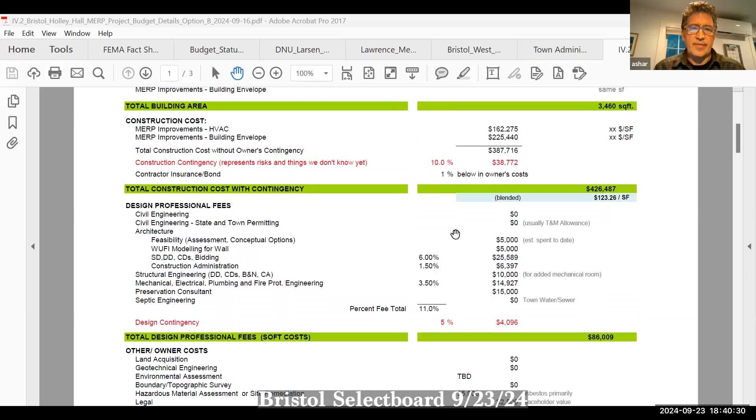So what was our total grant? 500,000, or at least that's what we're allowed to go for. Do we run the risk, by asking for the full amount versus 432, of not getting it, since we're still competing with other towns? Is there any worry about that? Because we could say let's do the full 500,000, and then out of capital funds we'll pay the extra 70,000 ourselves. But are we running a risk of not getting anything by doing one versus the other, since one's the full amount versus...?

Personally, if I was scoring it, I wouldn't look at it that way. I would look at what is more efficient. If I'm awarding you money to make stuff more efficient, I'm not going to look at the end dollar cost, I'm going to look at what's more efficient. It might even be more of an incentive if you're willing to kick money in to get there. Right, that's true — skin in the game.

Sorry, I just wanted to jump in — the application itself isn't worth a ton of points in the scoring matrix. So the first thing I'd say is ask for what you want, and don't try to game the application strategy too much, because so much of the points in that matrix are based on criteria around the town as it is — the population, staffing, and energy burden. Those carry a lot more weight than the application itself. So I'd suggest you just go ahead and ask for what you need.

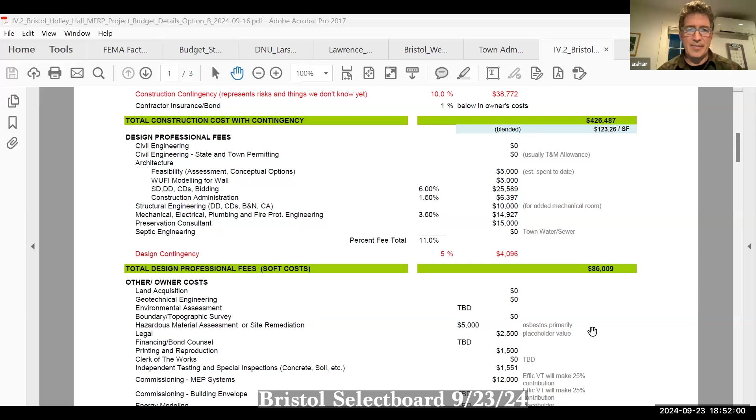So Bristol might be signing up for, let's just say it's at $571,000, but maybe there's 20 of it that wouldn't go in the grant anyway. So you'll have some kind of skin in the game no matter what, right?

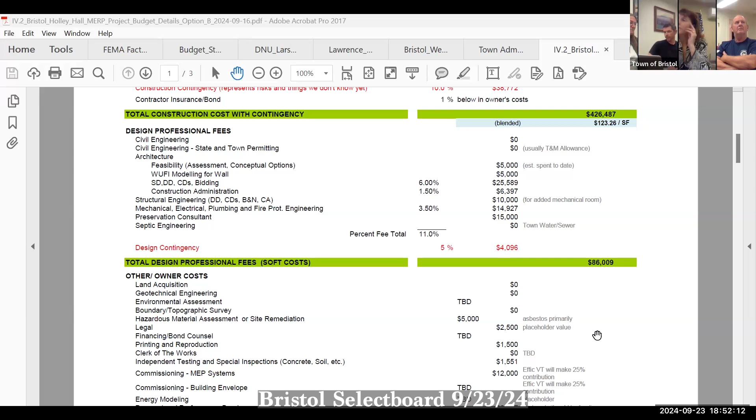Maddie, looking at the two quotes that were put together, can you see what wouldn't be applicable for the grant? I can't say this for sure, because as we've said, BGS is building the plane and flying it at the same time. But my guess is that most of the owner costs would not be eligible. All of the design professional fees listed there, I think, are eligible costs, and we've wrapped them in. I've got a draft application for folks to review once I know what to include and what not to include, but I've included all of those design professional fees in my draft. I have not included any of the owner costs.

The other thing I wanted to say - Asher, you might have stepped away when Greg was saying this to David and I - but I think he said he wouldn't require a preservation consultant for this project. He tries to avoid requiring that for smaller towns. So there are some costs that might just automatically come out of this budget. I don't think we should necessarily assume that, but it's nice to know where you stand.

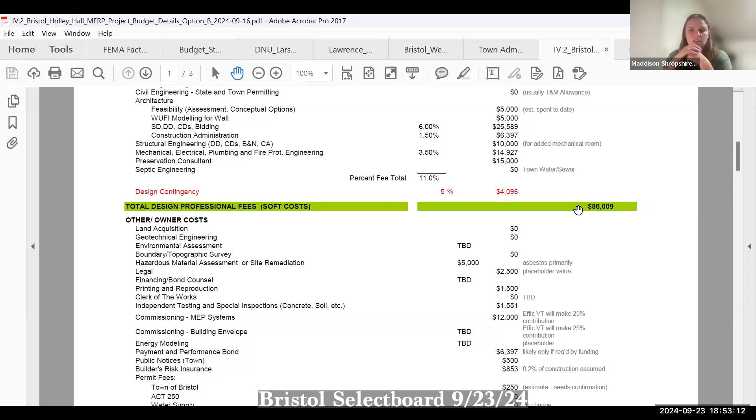And I think that's why we wanted to do this with you all and Asher. So does that make sense?

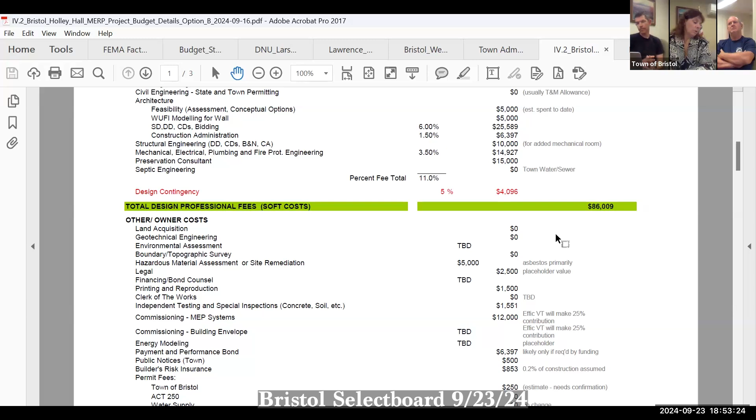So we're saying that in that one, it's 53,000? 53, yeah. You're thinking total wouldn't be 53, wouldn't be included in the grant application, and that would be on us. Right, which it already is because we're over by 71. Right.

So, David, what are your thoughts? Yeah, I was going to ask, what does the committee have? Well, I think from a building science standpoint, it only makes sense to do this project the right way.

That we can address the air infiltration and do vapor control. Air infiltration was one of the big issues cited in the report. The first option doesn't really do anything for air sealing or air infiltration for the walls. If you saw the infrared photos and thermal imaging, you could see the whole wainscot is just air coming right through it. The wainscot is actually applied directly to studs. There's no drywall, nothing, no plaster underneath that. So it's really just an open system.

And I think this approach, option B, is really the best approach. If we're going to do all this work anyway, we're going to spend almost $500,000 on option A. Let's do it right and do the added improvements to get both better energy improvement of the wall, but also that better control of vapor that goes through the wall, and also air infiltration to the building.

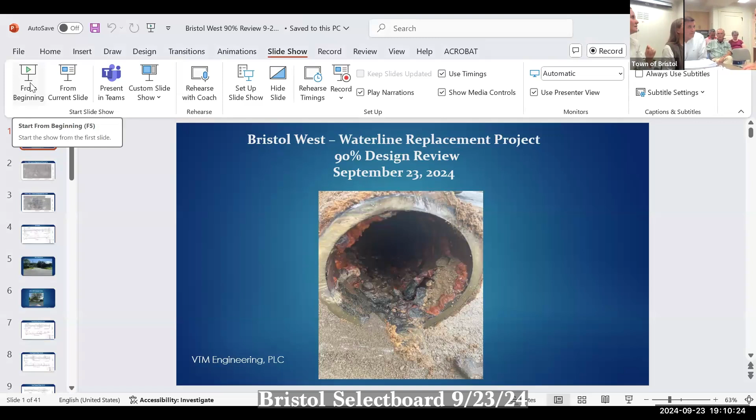From beginning, here we go. From beginning, right there. Click it one more time. There we go. Okay, she's good. Nailed it, oh wow, that's good, teamwork.

Is that the sewer pipe? That's our old water line. What do you think? That was Pine Street, believe it or not. Same vintage though, right? That's what we're looking at throughout town. So that particular section of pipe looked pretty good, but you can see a lot of mineral buildup in there. We'll get that on new ductile pipe, either one because it's lined with cement, right? So concrete lined pipes don't build up that kind of stuff. Gotcha, that's the whole point.

As all of you know, we've been working diligently between Jill, Valerie and myself on the design drawings, with the goal of being able to apply for DWSRF funding in January. So this is another milestone in that process. We had 30, 60, 90 percent review standards that we put in the application. This is one of the things we have to go through in order to show that we've done all the steps necessary to get the funding at the end.

I think we should just go to the next slide and get started. How's that? We're running behind tonight anyway.

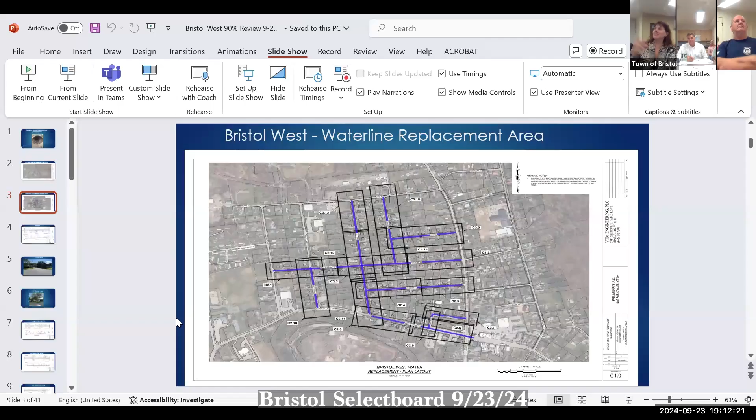So here's a map that we made up, and I think this is helpful for everybody. You've all gotten spreadsheets. As you realize, we decided to split this up into four separate phases. Pine Street was phase one, that's done. Bristol West is everything you can see in blue. Valerie, maybe you can point to it. Yeah, it's everything to the west of North Street. Okay, that's purple to me, but— purple, okay, because I looked first and the outside line was blue, and I was like, wait a second. Just do it.

Hang on folks, I don't know if we have folks watching from home currently. We might have some folks watching from home. I think it's helpful for me, I'm a visual person, right?

I can look at a map and I can say, okay, I know exactly what you're talking about. It's a little harder with a spreadsheet. So we decided to make this so that folks could follow along.

Here's the tank, exactly. Roads that aren't marked are ones that have piping that is of an appropriate age, correct, from the 70s. That explains why not all the roads in Bristol East are marked, and to the north too, because those are added later.

Yeah, as it expanded. And you can see your service area, sorry, I have a mental block here. So you've got a pretty large service area, actually, larger than expected. It was a long night and an early morning, that does it as well.

So I learned that these properties are also included somehow, but I don't know where. What are exactly those properties? Up to Hazel Drive. Okay, well just let us know, it's a simple change. I'm not sure how we included that.

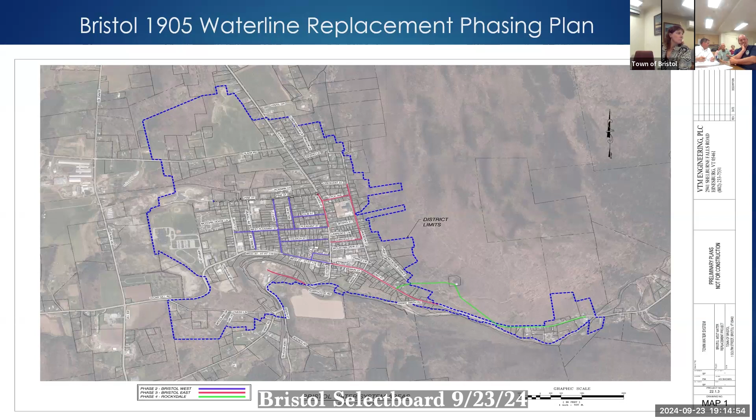Correct. Why don't we jump to the next slide, Randy? Can you hold your question for a moment? Yeah, I think he's on that, he'll get to that. Thank you, that was the next slide.

Very next slide. So here's Bristol West by itself. So there's 9 streets in here. Taylor Avenue, certainly one of them.

The thought process right now is to bid this as one complete project to be split over 2 construction seasons. And the low bid contractor would come to the town with a phasing plan and a schedule, and how they split that phasing plan out, whether they want to start Taylor Avenue as part of 2026 work or 2027 work. That's something yet to be determined.

We had talked at one point about recommending certain streets to contractors, and I think you as a municipality are better off - you're gonna get better bids, I think, if you allow them to come to us and dictate how they would like to do this.

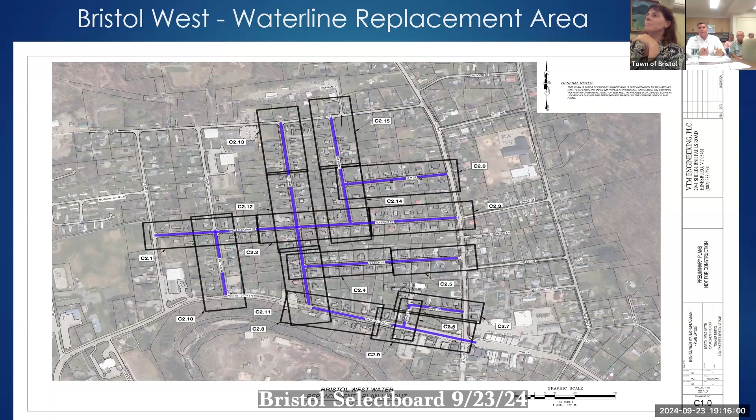So Steve, what are the black boxes? Oh sorry, those are just sheet numbers, you're gonna see that in a minute. Okay, I get it. Yeah, just tell me when you get confused. Yeah, please do.

Okay, so let's start with Elm, right next to you. And I think the easy thing to take away from this - we went through this 3 months ago, right? We went through the 60% design. The real change for you folks here is we've added and highlighted the trees to be removed and replaced. So there's give and take on every single bit of this. We sit down and we look at it.

And when we get to some photos here, you'll see some Elm Street photos, and we go through this on every single street saying, okay, number one consideration is how do we construct this the least expensive way possible? Number two is what are we going to impact if we do that? How do we avoid, to the extent possible, overhead utility lines, having to hold poles, limit the asphalt disturbance, limit how many trees we have to remove or we're probably going to kill by going through here. Those kind of things - so those are all things we're thinking about as we go along, whether utilities are in the way, how.

So Elm Street in particular, Valerie, let's jump ahead a couple slides so you guys can visually see what we're proposing. We're proposing coming right down the south side of the street, the right-hand side as you're looking at this photo. There's a green belt down through there that really begs to have a new water line put in there.

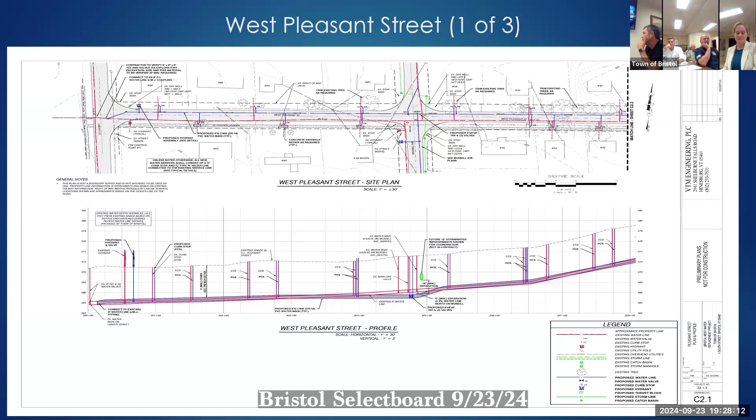This line right here, this is the schools, right? It feeds underneath like the horse, down that road - that goes to the school. Is that true, Joe? That goes right to the high school? That the West Pleasant one goes to the high school? Yeah, that's the one that goes to the school, right, where my cursor is.

I wouldn't call it the West Pleasant line - I guess you could, it sort of extends that way, but I always think of it as basically the back tie into the school. So the school has a feed from what I call Liberty Street, because I'm standing on Liberty Street when I look over to that line. They also have a feed on Airport Drive, so they're looped.

Okay, but this is part of the loop, so this doesn't get interrupted, or does it? Probably would have a moment of cutover. But it doesn't change the piping beyond that, heading to the west - doesn't go beyond Liberty, goes right through the field, because that was put in '68.

Okay, so it's tied right into this one and goes across here, but it's separate from this, right? Yeah, I see - because it's technically tied into Liberty Street, that's how I think of it, because West Pleasant is technically, you could call it horizontal, where Liberty is vertical. In this particular picture, it pulls off of Liberty, and it's not a T that's there.

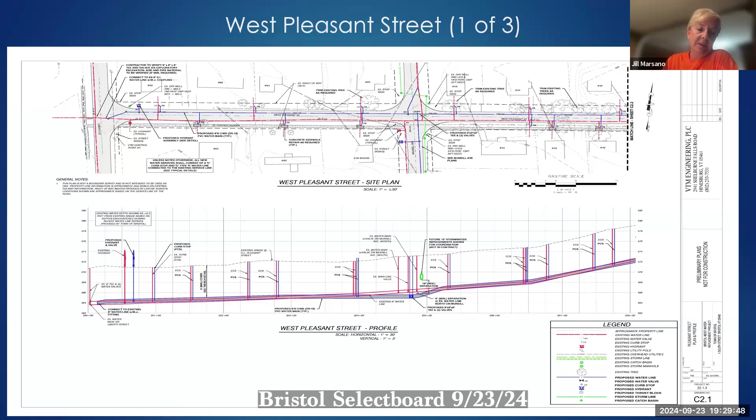There's something over by the horse ring, where there's a number of valves - it's something similar to that. But it's not a cross; there would be one that shoots right straight across Pleasant, correct, comes off of Pleasant, goes right straight across. It's offset slightly - it's probably jogged a little bit further north, from what I recall being in that intersection.

You wouldn't be shutting off the high school, even if you had shut it off, because they're also fed from Airport Drive - they've got two feeds. Their hydraulics would change a little bit, and I think if this project ends up anything like Pine Street, we tried to make sure the shutoffs were as tiny as possible and that the cutovers were done strategically one at a time.

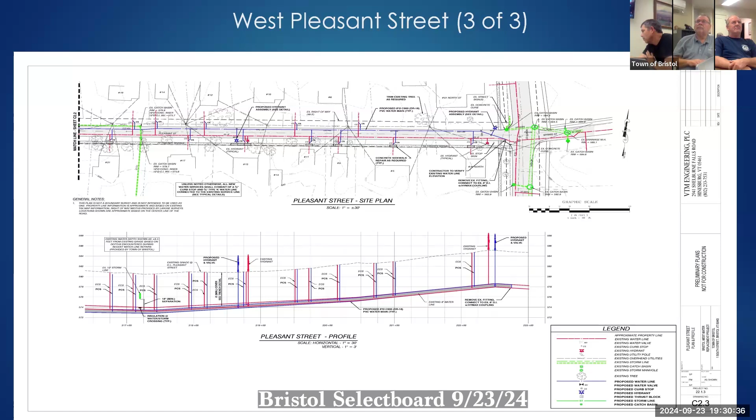Okay, Doug, go back two beyond that. So for our Munsell, we have our drainage project that we're working on.

What's the tie-in with that? That's this green project - so we added the locations for that. We did a preliminary design, and we tried to assume that it was in place for this drawing when we designed this, so we wanted to make sure we left Eric enough space to be able to do that if we need to. The thought was that drainage would go in with the bid, and the contractor could be going north on Munsell towards the old Autumn Hart building up to the crest of the knoll, and put the drainage all the way to West Street.

We did do a scoping study for sidewalk, but at the moment I don't think there's any firm plans to place a sidewalk on Munsell - only conceptually at this point.

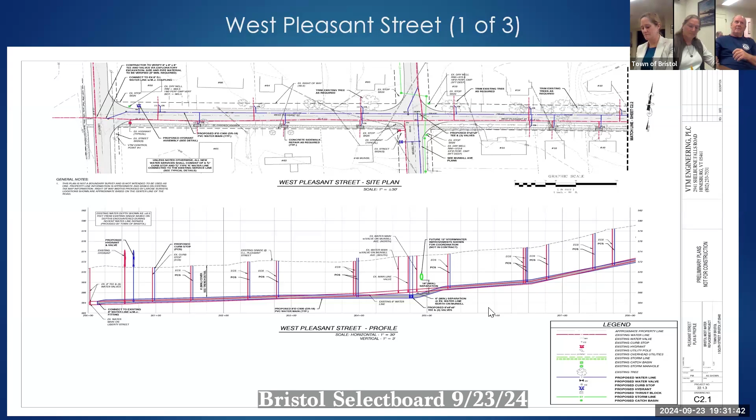Okay, all right, so we could move along - go to the next intersection. Same thing, right? We're essentially avoiding all your existing utilities. Everything up here in green is existing today, so all your drainage structures, that's either what's on north or...

So what you're saying here is Taylor, from North Street intersection all the way west to Liberty Street, you're down the middle of the road. It's on the north side, in the west-hand travel lane, correct, and it's a pretty narrow street.

When we get into it, we had the luxury on Pine Street of some added pavement right there - you gotta look at a lot of these streets, you've got a lot less added pavement now than we had before. We had the luxury of running one-way traffic and doing all these things. I think we're gonna be much more pinched and compact on some of these streets, especially when you get into like Elm and Taylor - they're pretty narrow streets.

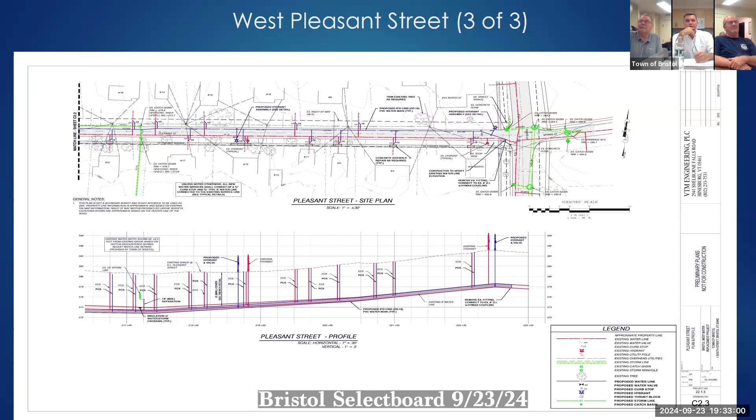Okay, so questions on Pleasant? There's no trees that we're proposing to remove on Pleasant. That's great, so I think that takes away some of the challenges and concerns we may have from the public. Okay, next.

Sorry, keep going. Just trying to shift around. Looks like one to West Street - yeah, that's Taylor. You can see some of the challenges up through there, right, like if we were on the south side of the road.

Oh yeah, okay, you see that tree, it looks healthy. Go back, please, one - that tree looks healthy, yeah, and give that pavement three more years and it's gonna be needing replacing anyway.

It's time for an overlay now, but we've got a water line project coming, so you might as well wait. Okay, Church Street.

Church Street is pretty straightforward, same thing, right? Existing water line more or less on the south side of the road, new one on the north. There's one slight jog in there to get around the drainage structure - we need to stay 5 feet off the drainage structure.

Can you put that one in the sidewalk on either side? By law, that's a fairly new sidewalk. Well, we can take a look. Doesn't look like it, believe me. Is that Church Street? Yeah, it is.

Maybe at the far end, the water just sits on it, towards North Street. Right, so you look at this, shade of green down there shows you why we decided to go on the north side of the street. I agreed with that. When your green belt's higher than your sidewalks, that's your problem.

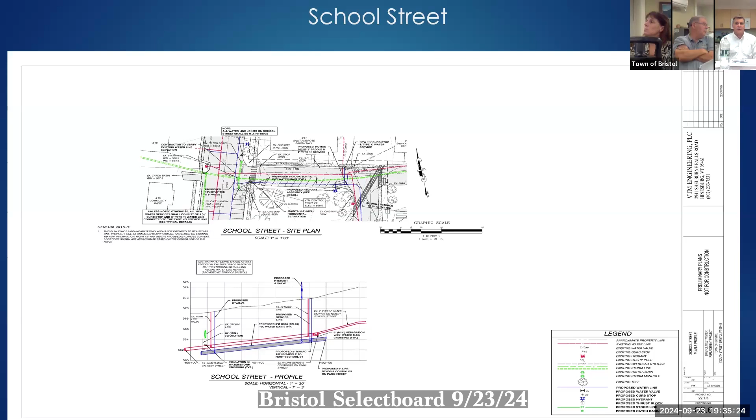By the way, we did overlay the drainage project that you folks had provided us information on. There is a conflict there if they ever go ahead with that drainage project. Beauty of the drainage project is that it's completely modular, so it might require some rethinking of how you lay that into the park. They might have to move the playground equipment in order to put that in, for instance.

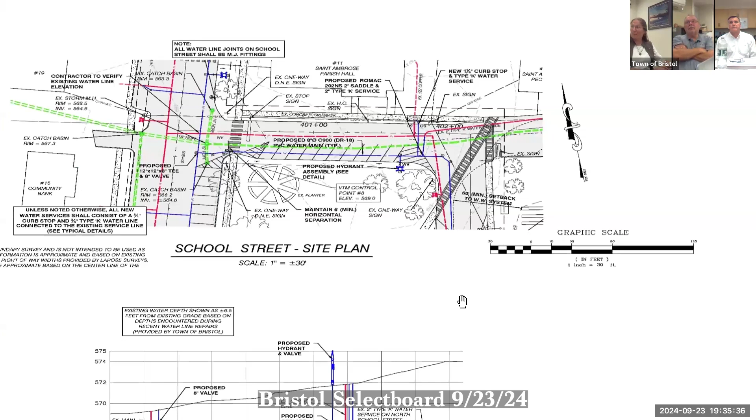Steve, I have a question on the Park Street, not the school. The Park Street is the one where the dentist is. Yep, that's the next one, the very next slide. Oh, okay, I thought that was it. You done with this one?

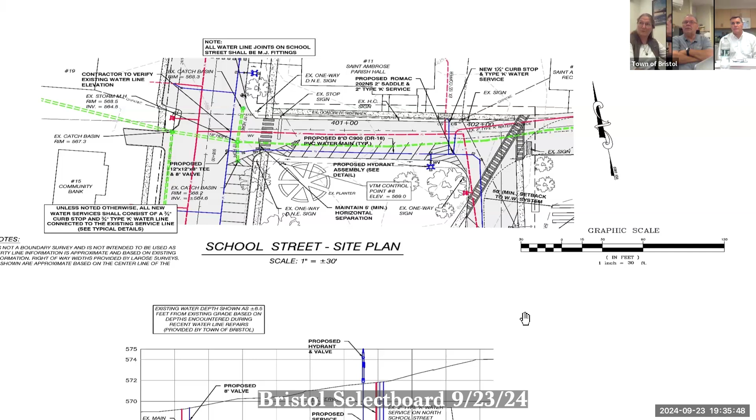Yep. Uh-oh, now you gotta make it smaller again. Here's just a picture of school. Now the next one should be Park.

That's going over in the parking spots. Correct, and that was intentional.

I guess the question I have is, what would be the cost? There's just two structures that need water on Park Street, the dentist's office and the church. It's a loop system. I know it is. But that's the reason for putting the big line down there.

I know where you're going, just put services to those houses, right, and bring it from West Street up School, and then maybe cut through the alley like we talked about and not do that section with 6-inch or 8-inch main. So the hydraulic analysis recommended looping. Okay good, so you see where I was going with that? I do, yeah, I knew right where you were going.

Correct, next. So by the way, we intentionally chose the parking spaces because I think here we've got plenty of pavement width to be able to hopefully retain some traffic, and we can all work together on how we're gonna use the park - that's a really well-used area, especially in the summer.

And I think we want to find ways to try to maintain that normalcy, as much as we can, maybe if you did it early, before concert starts and things like that. And I think those are all discussions we're gonna have with the contractor once you know who it is and what their phasing plan is.

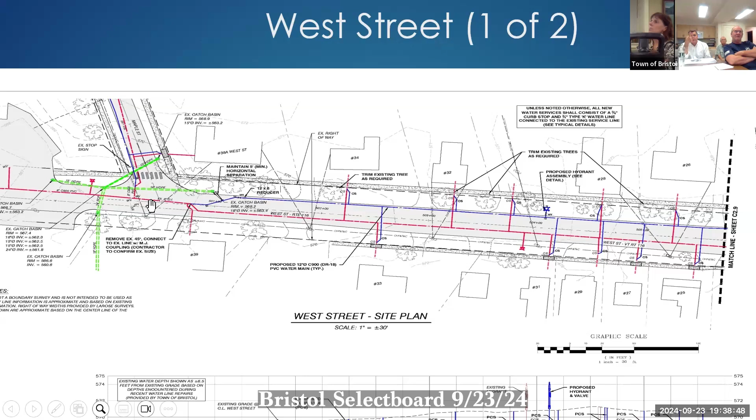Valerie, I think if you can skip ahead to a picture, it might help folks understand how we got here. Okay, so here you're looking essentially from Maple Street, looking east toward downtown.

The existing line runs right down the right-hand lane, almost in the middle, which obviously we're trying to avoid and maintain traffic and do as much of the other things as we can with limited impact. So what we're proposing is to be on the left-hand side of it, almost on the white line, so to speak. That's a huge green belt down through there.

And there's some huge trees down through there that if it were in a different circumstance, I would probably say go right down the green belt, but I think you're gonna have some serious pushback.

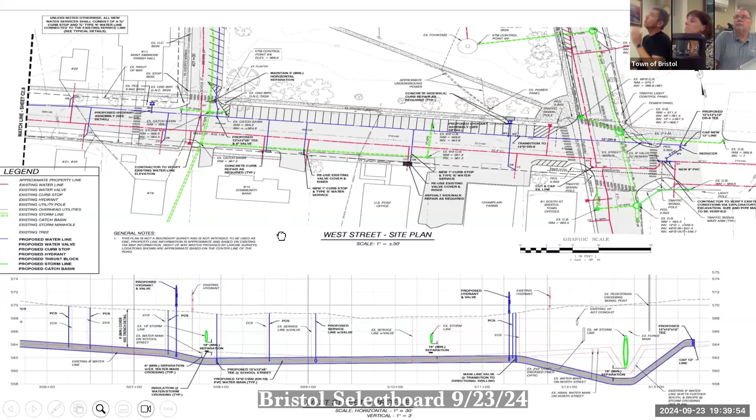Can you go back to our map? Right back on page one. So we did get a grant for a scoping study, which would be to improve the sidewalk all the way down on the south side, with the intent of running a new sidewalk all the way to the creemee stand.

But there's trees and more trees on the north side. Yeah, we're gonna stay right in the pavement, just on the edge.

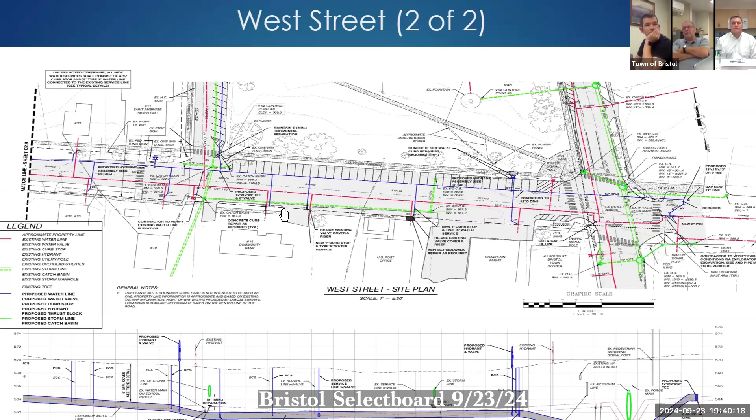And I think West Street is wide enough where you're gonna do 2 lanes of traffic, almost. Yeah, we'll say that would be the goal, to maintain two-way traffic to the extent we can. And I think we can shift traffic, we'll probably shift the center line temporarily, call it trying to think of barrels. If we shift the center line, and as long as we can make 10 or 12 feet on the edge for us to work, I think we'll be able to work on that, and that's your major thoroughfare.

When we're cutting off traffic there, it's gonna happen at some point, but those are pretty big impacts. I think we had a brief conversation once about possibly some of this work, especially the switch over here on Main Street, try to be done at night. And you'll talk about that in a few minutes, probably.

Yeah, we're gonna get to that section in a minute. And that really is up to you folks. I mean, that comes down to how do you want to portray this information, and what information you say - here's the things we can live with, here's the things we can't. And everything comes down to money. If you're gonna say, hey, you gotta do this on weekends and nights, well guess what - more labor, it's gonna cost more money.

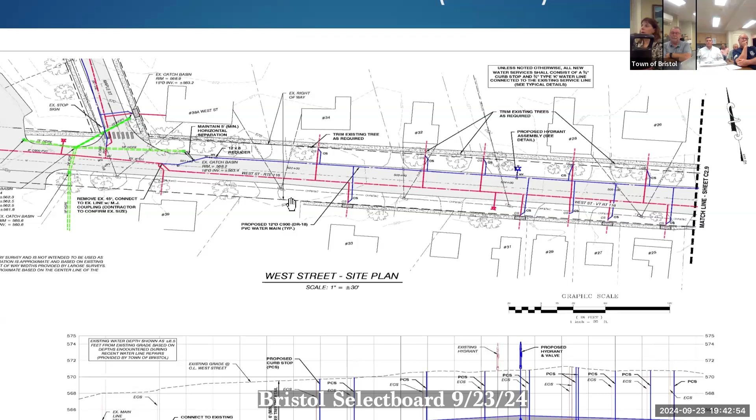It's a given. I think the question is how do we limit the impact at that point. Those are things we should all talk about when we get to the construction stage, and we're not there yet. Is it in the right location, and have we considered everything we need to consider?

The only thing at night I'd say, Joel, is be cognizant of noise for folks running, especially in summertime with windows open. We get noise complaints all the time on other things in the village, so working at night may not be ideal. We had complaints when they were doing paving or snow removal at night. Well, they won't be doing snow removal while they're putting in the water line. That's right, we've eliminated that.

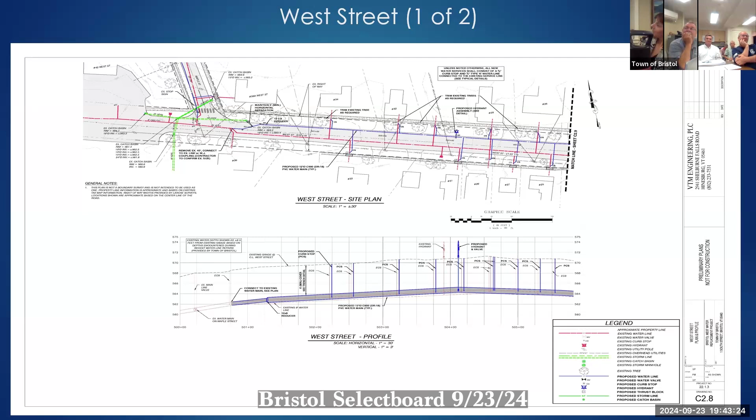Okay, let's move on next. Maybe we could have them do it the same night. Where's that in your book? Go ahead, sorry.

I was just looking at Google Maps regarding the amount of trees. If it's on the south side green space, there would only be one, potentially two trees you might impact. Correct, and one of the big concerns there was overhead power. It's true, all the poles are on that side.

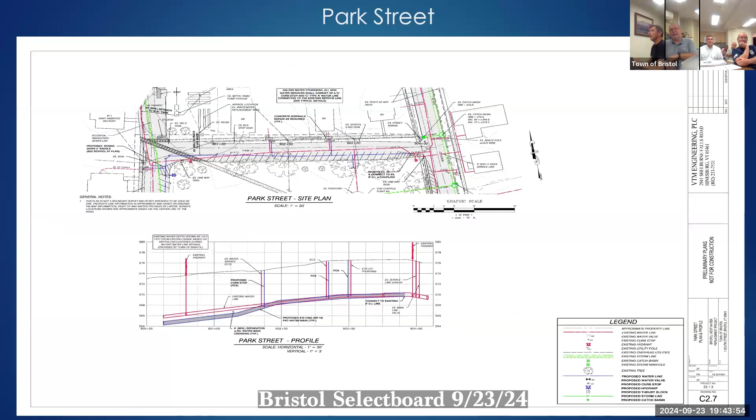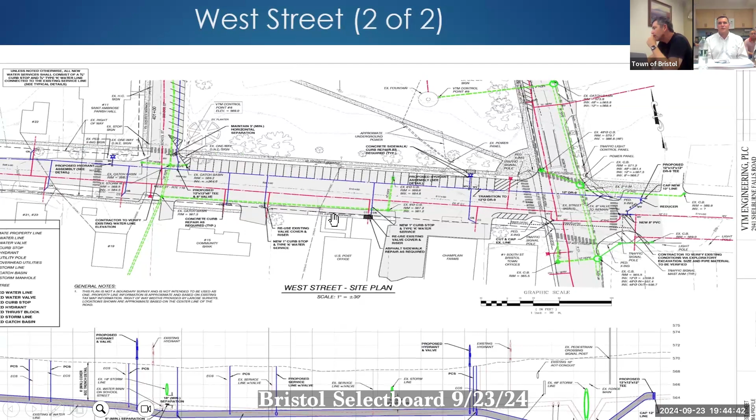Okay, if we could jump ahead to slide 2 of 2 for that. Yes, right there. Okay, so here's what I refer to as a spaghetti intersection, because there are so many utilities here it makes my head spin.

So this is the section we proposed to directionally bore. To go with Joel's point, we'd need to shut down the intersection to try to get through there conventionally. It's possible to trench this, but you'd have to shore the whole thing, we're not going to get a trench box in between these utilities, so we'd have to come in with plates and shoring, and it's a long, expensive endeavor. Directionally boring is a lot smarter, there's a lot less impact to folks.

I would imagine they'd do that as one of the first scopes of work, but we'll see. The goal would be to get underneath, and if you look at the profile underneath, you can see that 54-inch drain line in green right there. The existing water line also dives underneath that line, that's what you see in the V right there in red. That's the existing line, they did a little jumper line in there back when they did this.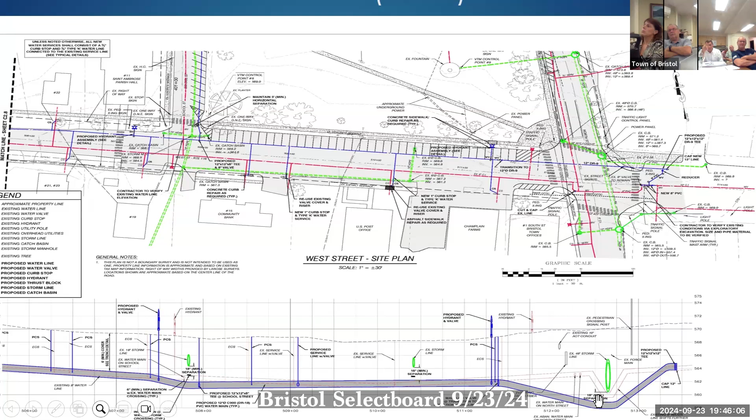When was North Street done? The big project, before my time, 2008, the big dig up through. So we're going to say 2008, it was the same project.

So the boring would go from this side to this side, correct? West? Correct, east to west. And that's all you're doing at this point, because the rest of Main Street is on the east, Bristol east, correct. You've gotta dig there, gotta get under there. The idea was you're going to bore to the west side of that 48-inch culvert, correct.

When we get to Bristol East, we'll have some sort of traffic detour. I'd imagine when we go down east, we'll have a detour at some point along Mountain Street and come back to this intersection. It'd be really nice if we didn't have to go back into this intersection as part of that project, and we can bring people up and around. So the goal was really to try to get to the east side of the intersection.

There's a lot underneath that drain, it's gotta be all new pipe. But that's distribution, no, actually we're gonna keep that. We're gonna hook into that.

So everything coming down North Street, you can see it come right down north, down towards south. Stop, see that little jumper that goes off right there? Yeah, it keeps going to the east. No, not south, east, towards your right. There you go, all the way over to the blue line, that's new.

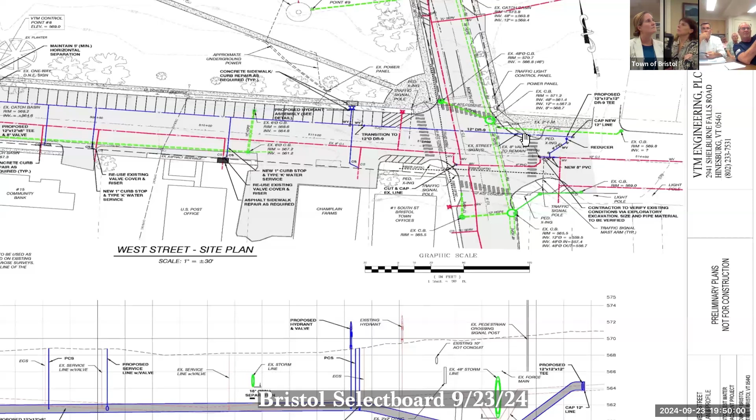Catch basin with 4 foot of stone around the outside of it. Where are you at in North Street? Talking to the west of the green line, where you're connected. Yeah, right there. That's pretty deep.

It should be called out right there. I'm sorry, I can't read it, it's not very deep. Valerie, could you please zoom in on that? Enhance, enhance.

That's a 15-inch pipe that goes across, and there's an 8-foot drywell. It says basically 15-inch HDPE. Right there, that line is 15-inch that goes across. And right where the cursor is, that's an 8-foot drywell with 4 foot of stone around it.

Okay, good to know. Steve, we may have to shift it over a little bit and propose like that. That's what I was saying, maybe there's nothing hitching in, maybe we go back just a little bit further and do directional boring under all that. Right, we still need to avoid the structure though.

Yeah Steve, what's where the red is, where it says transition to 12-inch DR-9, there's a line. There's also an 8-footer back on the end of School Street. Yeah, it should say transition.

And there's also a 12-inch one in front of the post office, DR9 HDPE, just before the post office. Doesn't matter which side of the road. So that answers Speaker's question too, about the hydrant. We transition right to the right of the hydrant. Yeah, the idea was to have the hydrant on the 12-inch PVC. That's the only reason we're putting that in.

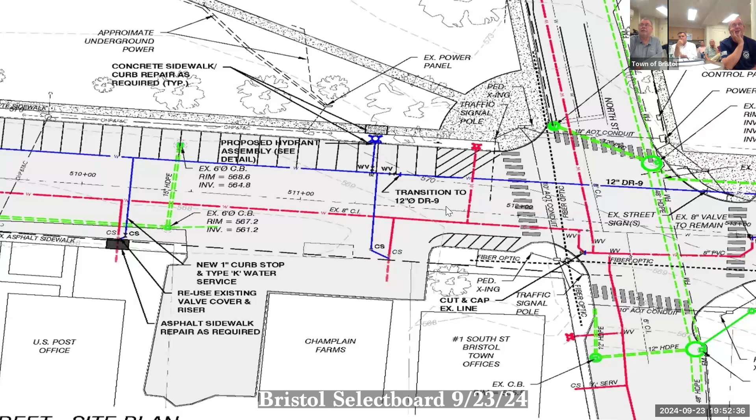Yeah, but we have to tie into the HDPE. Remember, the HDPE line right there is diving, going deeper from there, it starts toward the main street, going under the light, getting under stuff because they're boring it. It starts going down to miss all the traffic control stuff and everything, and then comes back up on the other side of the drain.

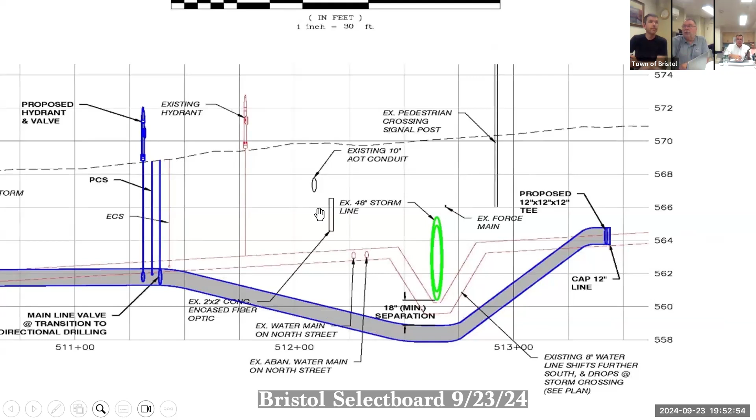I don't want to lose 3 parking spots. So let me ask you this: why couldn't, if that's your concern, we put an elbow in and bring that hydrant down along the edge of the sidewalk, and put it more or less where it is today? Would that work? Do it right there, where it is now, and bring it diagonal back over to the blue line. Could you do that? You don't diagonal with that stuff, you put in 45s or 90s.

Well, okay, so you run it to here, and then you just run it down here. Correct, keep it there, that'd be great. I agree, it's in a perfect spot, right in that corner. Peter knows, we fill up with that all the time, just south of town. Well, the other side, like you said, you'd have to give up the parking places. And we can't put parking places closer to the intersection anyway, so we can't make them up.

That's Val's parking spot right there, the handicap one. Actually, if we take Val's car and put an adapter on it, she can just drive up to the hydrant, we'll open the trunk and hook the hose in right through the car. Perfect, a special way of detailing. Maybe we could get an electric charging station there beside the hydrant, so when we get an electric fire truck, we can charge it up the same day. Okay, let's move on to the next slide.

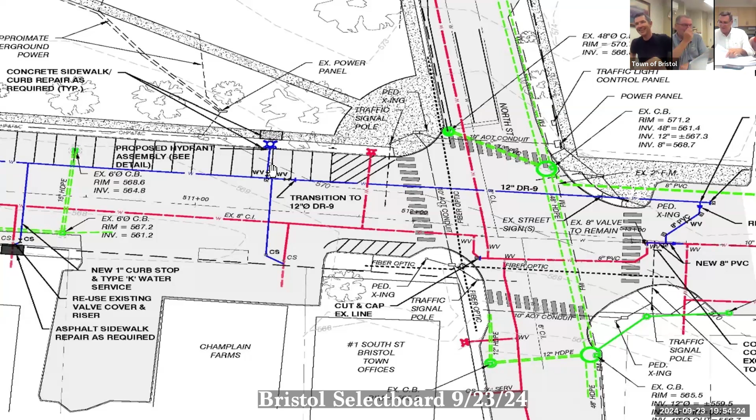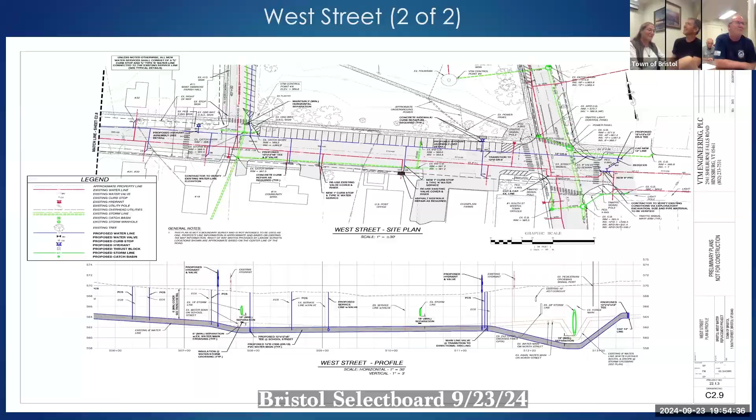Believe me, they do have them, with an onboard diesel generator, the engine is about 1.8 million, and they last about 3 hours at a fire pump. That's why they have the diesel generator. Let's keep moving along.

We're good, okay, time schedule. Where are we going next? All right, we're on to Munsill. So Munsill is not really straightforward, we had a lot of challenges. We figured this one out when we did the sidewalk scoping study. There's a lot more going on in Munsill than you realize, but essentially we ended up on the east side of the street. You can see the blue and the green, east side, yeah.

That's the west side, Steven. Your blue road line is on the west side. That road's in terrible shape. This way is east.

Hold on, we've got about 40 conversations going. Sorry, no that's all right. Valerie, could we just move on to a picture so we can all visually see it? There we go, is that it, Munsill?

So the east side was also the selection for the sidewalk. That's what came out of that scoping study. That was the only one. We looked at both sides and not that anybody wanted it on that road.

We originally tried to run down the west side of the road right along the edge of the greenbelt. The existing line runs almost right through there, and that was really our challenge. Remember, this is a 120-year-old water line, so half the time you don't want to breathe on it.

Just take the old one out. Things happen. Jill would get really mad at me if we were very close to it. I see her laughing. What are you gonna do?

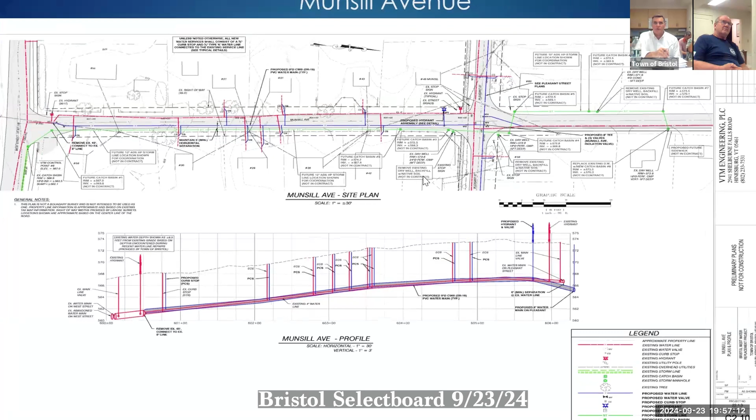And you're gonna do the work. Did you see the scoping study that was done? Did you have that? I did. And we had, at one point, a draft showing where that sidewalk might go.

Okay good, so where do you go on the other end of Munsill? They told us to stop, zip it up. That's a 1974 line.

So you don't have to do that one, okay, correct, we just need to cross it. That's handy. Oh yeah, look at that. We just need to cross the intersection, that's it.

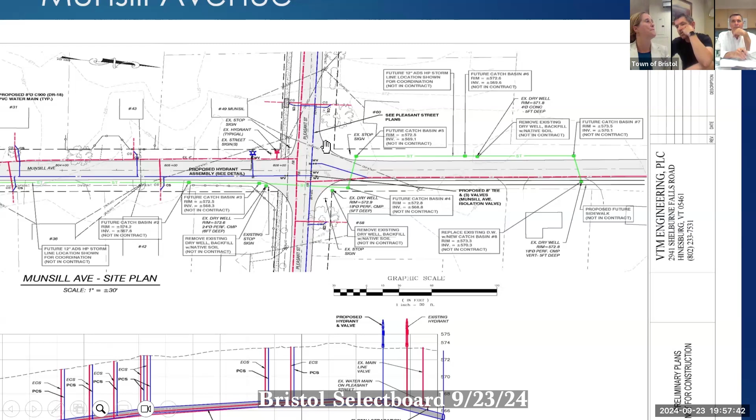Doesn't feel like it. Taking the factor, like I said, that street, the lower half isn't that great. We're gonna tear up most of it, or at least the eastbound lane coming north on that street to West Street with new drainage.

I would really consider going up the middle and doing like we did Pine Street, just grind the whole street when you're done. He intends to grind that anyway.

Right, so instead of trying to go up, I understand you want to keep one-way traffic and I really respect that, but we got through it on Pine Street. We just went up the next street and came in. Well, we pretty much kept it one-way.

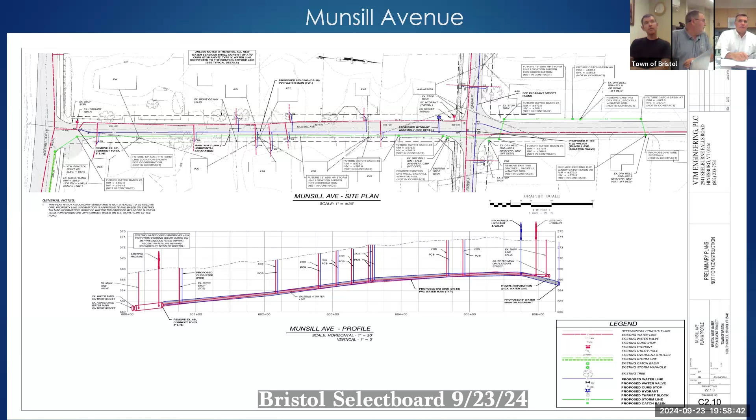Closed block to block, I mean, we had flags. Yeah, we did a great job often that we didn't have one-way traffic. Well, look at the way we did it down the middle, how much easier does it make that particular road? Given the power lines that are along there.

And you don't want it in the northbound lane, do you? Because that's where the structures are gonna be going, and the 2-foot culvert over the top of them. I'm asking, hey, you're the engineer, are you saying from west all the way up to Munsill, just have it west-centered?

Yeah, center, because the structures are gonna be in that northbound lane. No, there's no structure there. See the green? We're off, you're talking about future drainage structures? Right, you're off in the green. No, I'm not saying future, they're going in at the same time. I don't know that that's true.

Am I including this? I think that was their contention. I think the drainage structures were intended to go in first, beforehand, but not part of it - he talked about it separately, as a separate initiative, as an add-on to the water, by the contractors there. He's putting in water and he can go right down through, put structures in.

Kind of like what we did on West. Eric had proposed asking that as a price, amended, put them in the addendum, same time, and maybe the same contractor will sit on both. I'm right here, slap them right in. If you're digging the drainage, you're halfway up the street. Well, they're not, the drainage is right in the green space.

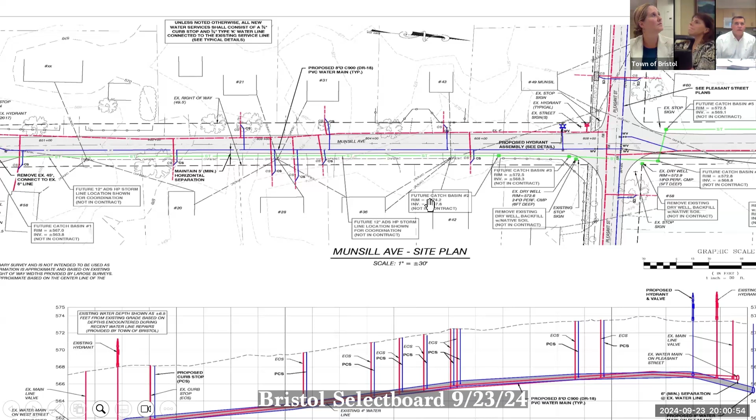I think we added one, we're gonna let that run all the way down. We wanted a clean-out structure somewhere. I'm pretty sure there's a couple to go up on top. I'm thinking south on that street. Sorry, but I only see those two. I see another one, yeah, I see two. Oh no, there's one, yeah, three, there's three. There's one down at the other end toward west, correct? Yes, right there, yeah.

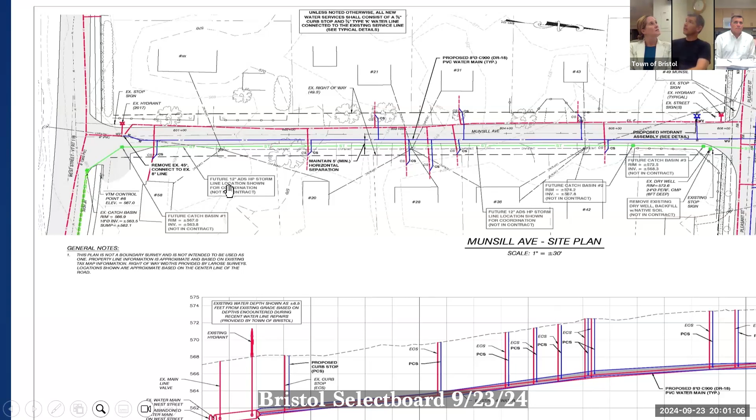And then we tie into the existing structure. I'd say, since we have a heck of a lot of cross streets and it's a small section, if it is beneficial to putting it nearer the center, I would maybe look at that, with the potential for saving money, and again for tying in with that drainage project, and then you don't have to deal with all the power poles and things like that.

My thought, back to the structures, is that's a couple hundred feet run between the last one from the West Street corner all the way up to Munsill, or West Pleasant - is to put one in halfway, instead of water running down the road to get to the next structure. You don't necessarily have to put in one of those dry wells, but it would catch more water, and less water is gonna make it to West Street.

Okay, just a thought. You saw the structures we put in on Pine, right? I did, that's what we're talking about putting in, with piping in between them. So if the rain is more than what the structure could take, then it acts as a catch basin.

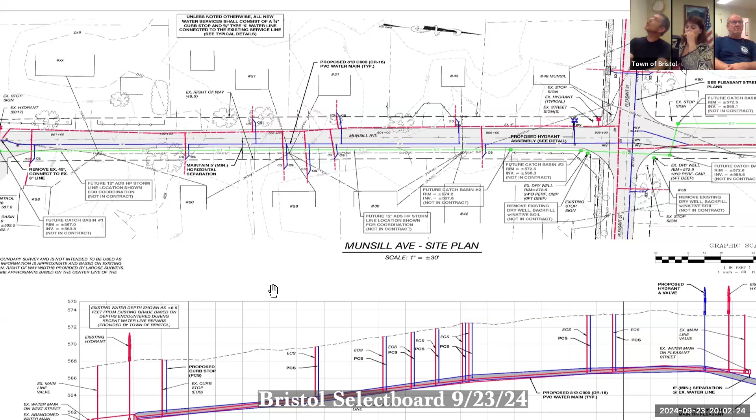So with this particular project, do we have an opportunity to reshape the Pleasant-Munsell intersection there in terms of sidewalk? Remember in the scoping study, the sidewalk comes through - because when you're stopping here, you can't really see much. It'd be lovely to be able to sort of reshape these if we're digging this all up, and we have the guidance from our scoping study, which is sidewalk all along there.

Even if we're not doing a sidewalk, we could take some of the designs that were done. You've got good sight here. This is a house with no sidewalk, but the sidewalk's hanging up here. It'd be great to reshape that so it's safer for pedestrians, on both sides since it's all getting dug up. And the drainage works as well, because right now there's no water flow, it's a big problem, big swimming pools right there.

Okay, all right, that's it. Are you here just to listen to Taylor? Yes. Is it okay with everybody if we jump ahead to Taylor? Sure. Do you need to look at me? Because Maple's kind of long.

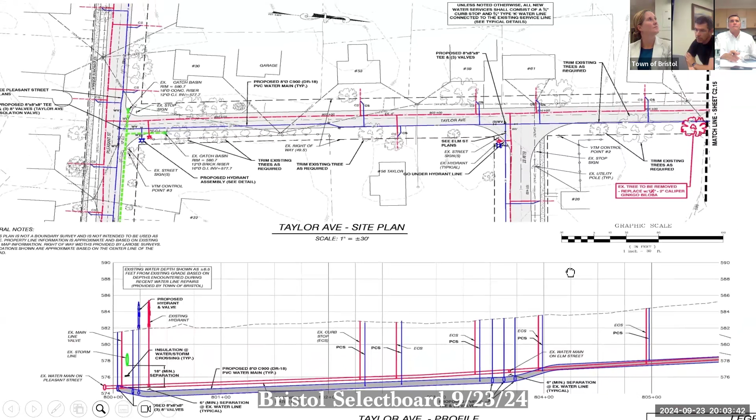Taylor, there we go. So, from Pleasant Street, we're working west to east here. Pleasant is on your left, Elm Street's in the middle, and Pine Street we'll get to in the next slide.

There are 3 trees, I believe, with this alignment, and this is probably something this gentleman may have concerns with, right? Three trees along this segment that would be impacted. There'll be some trees that need to be trimmed as well, but you're only replacing one. That's why you haven't seen them yet. There's only one being taken out, so there's 2 more in the next slide.

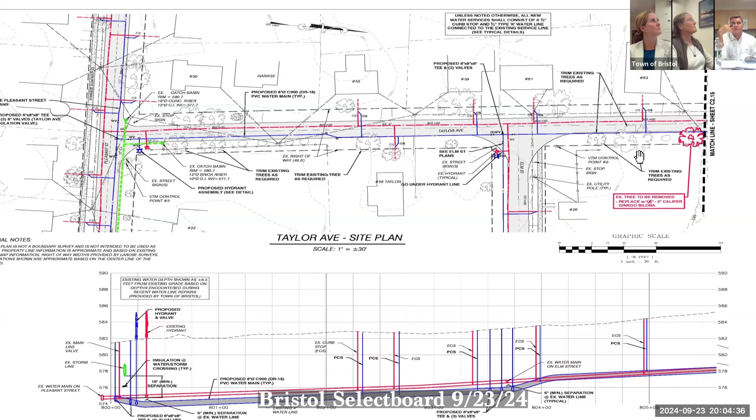Next slide. We're proposing to run down the east side of the street. How come you have a little jog there? Let me zoom in on that, there's a conflict somewhere there. Oh, there's the next slide, right here.

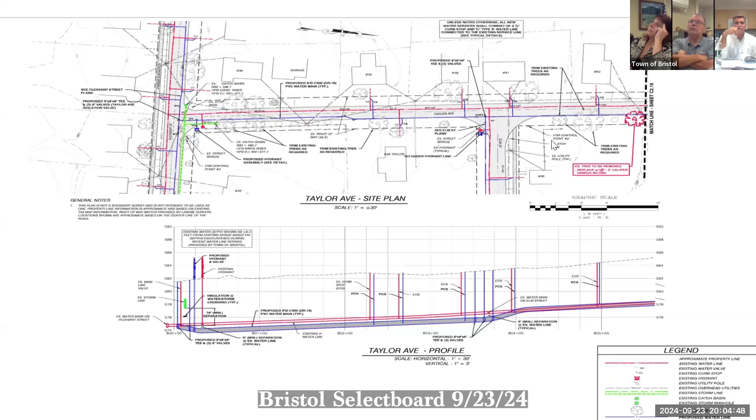Where's that? I can't see from here. We wouldn't have done a jog unless... oh, I know why. We were coming down the edge, think of it starting from right to left instead of left to right. There's a fence and a whole bunch of trees, and we decided we're probably going to stay away from them. I think we're gonna get a lot of pushback there. Yeah, you'll see those in the pictures.

So we're trimming a tree there as we go up, and then we've got one at the end of the slide, to be removed and replaced. Here's our next one, and then there's 2 more.

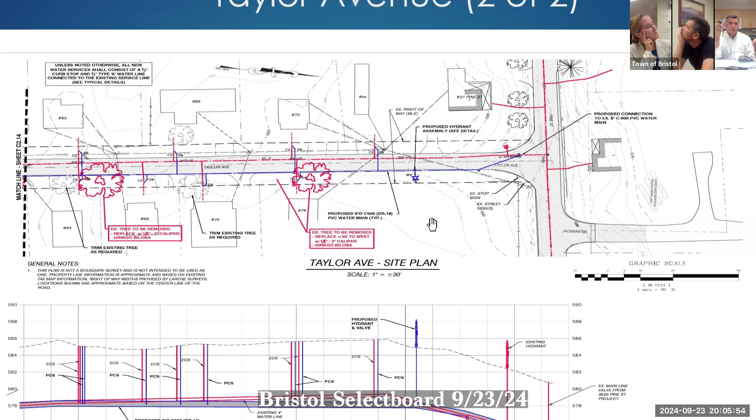There was a lot of discussion about this when we were working on the design, because some of these trees, these 2 right here, are beautiful trees in front of historic houses. It's not an easy thing. So if we go to the pictures, Larry, maybe we can see, I think you get a good sense of why this is where we had to jog out into the roadway.

We were just talking about the jog. So here's the trees on your right. That's not a great picture of them, but there's a big fence in there as well. If we go to the next one, I have one there, we go, that's better.

There are some of the trees. Are there only those 3 trees there? No, there's more than those, but those are the biggest ones. Those are the 3, and we're not proposing to go through the middle of the trees. The forester said to me, Steve, they're not gonna survive. You're within 2 feet of the trunk of the tree, you're gonna take out 50% of the root system of that tree.

And then you're gonna leave it with no way to hold that side of the tree in if you get it. You're saying if you're in the road? No, around the edge. Our proposal was to run right down the edge, and we were trying to stay out of much of the roadway, just because it's so narrow. And we've got all the utilities on the west side of the roadway.

Here again, we're gonna repave the road, and I really commend you guys for trying to keep some traffic open, but this is a tiny side street during the day. Those trees took 100 years to grow, and they can repave the road every day. I know it's a cost, I get that part of it.

Taking the trees down has a cost too. But Joey, that pavement's the same age as when you did Elm Street, so it's only 2-3 years old. If this was down in the '27, '28 era, maybe 3 to 4 years later, we'd get a little more life out of that.

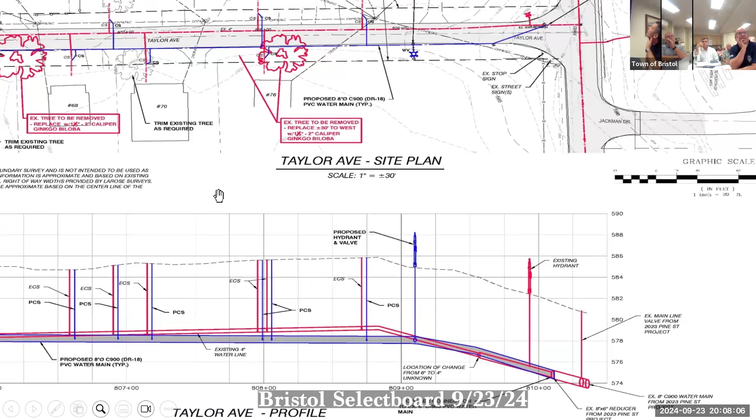That's what this is all about. It may come down to whether we got the contractor to do a better job of tamping it, so it wouldn't settle like Pine Street did. Pine Street was a mess anyway before they paved it, before they dug the water line. It needed paving for 15 years.

If we went in the middle of the street, can we save those trees? Yes. That's what this comes down to. It's a balancing act, right?

You're gonna add 30 or 40,000 dollars of cost to the project for that. What is the cost? We're talking about 3 trees. I look at the number, 3 trees, it's 30 grand at least, and you just paid to pave it 3 years ago. It just seems like you're throwing away a lot of good money for 3 trees. I don't mean to sound cold, but I'll bet it costs you 15,000 to get those 3 trees down.

Yeah, it might. Minimum 5,000 a tree to get rid of the tree and the stump, and then put one in. It took a lot of years to grow.

If that street's not in terrible shape, and it was 3 or 4 years ago that we paved it, we could just cut it and repave that section, then a couple of years later skim coat with 1.5 inches over, not having the amount of expense we had on Pine Street, because that street was a terrible mess before they got started. We don't have to grind Taylor and Allen if we went down the middle.

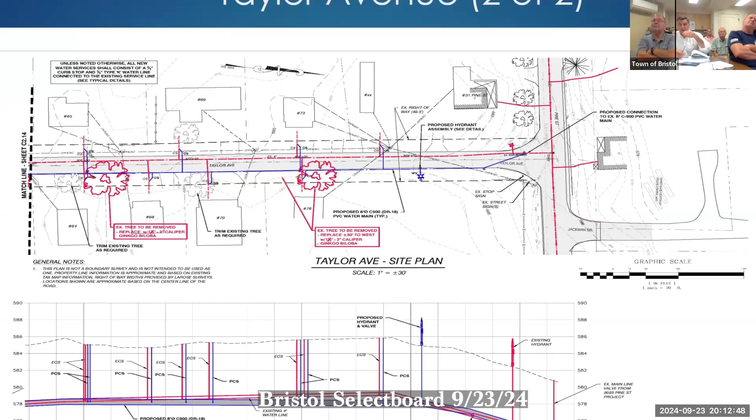Wish I had a picture of that one. I don't, but I've got a note in here. I'll work with Valerie and we'll sort out how to do that. Thank you. Any more?

We gotta go back to Maple, we didn't do Maple. Oh, we jumped through that.

Did you have any questions or anything you wanted to ask? No, I think I'm all right. Even though we had a big tree pretty close to the road that had to be taken down, I know a lot of the people on the street. I was just wondering what was going to happen, because some of them are a little touchy about their trees.

Well, they're attached to them. Takes a long time to grow a tree. I know, two generations, getting that size.

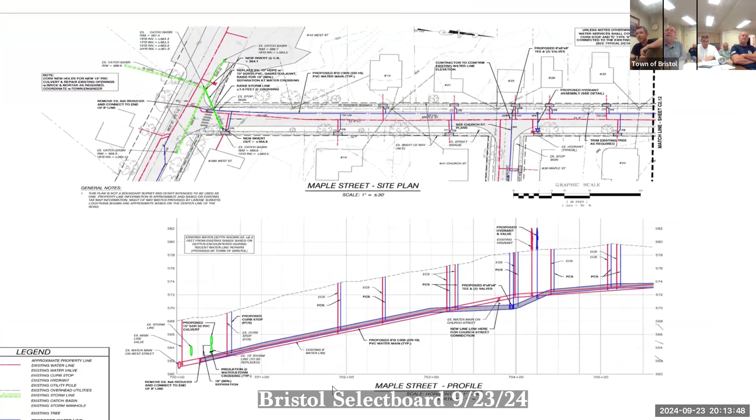As this project progresses, there'll be information on the town website as we get towards it, similar to Pine, where it was very well organized in terms of letting residents know when construction was happening and how long it might take. We'll do all that process again for this project at a much larger scale, since there are a lot more roads we're dealing with.

We won't show up and start digging with a chainsaw in the morning. No, not at all.

Well, thank you for coming. And don't feel you have to leave, Randy—you can stay if you want. It's riveting, this is riveting.

Okay, Maple—this is one of our longer streets, right? Yeah, and there's a lot of trees on this street. There are, and this goes out all the way from west to Pine. So Valerie, I think maybe I should have reversed the order and put the pictures ahead of time—is it easier to look at pictures first and then people can visualize, then we jump back to these?

I don't know, doesn't matter. I think we know the roads. We know the drill now. We're connecting right on the very left-hand side—you can see some drainage there. There's some conflicts with the existing drainage right away, so we need to remove and replace the existing drain line.

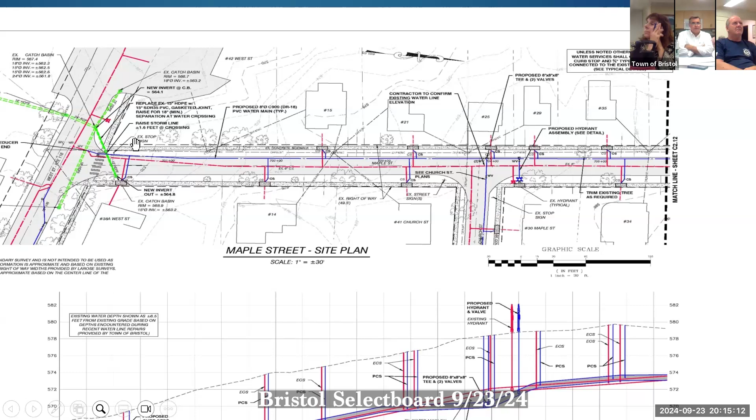By law, we need a minimum of 18 inches of separation, so we'd go right to the middle of that line. That means we'd have to go under. It would be pretty costly for us to do that, so we decided it'd be cheaper to remove the drain line and replace it.

The existing line runs more or less right down the middle of the street, shown in red. We're proposing to run the edge of pavement on the west side of the street instead. If you look at the photos, you'll get a good feel for why - the street's terrible, especially from Church Street up.

It gets worse as you go north, along the power line side. You can see the poles are offset, probably 4 feet from the edge of asphalt, so we're going all the way. We'll be in the asphalt, but just barely. That's the proposal - right in the center is the old one.

If we chose the other side of the street, we're into every one of those trees. I agree with you - stay right in that right-hand lane, like a couple of feet off the edge. Again, it's all a balancing act.

Two of the big trees down on the end of Maple came down in the last storm, so you don't even have those to worry about. There's one more slide, one more picture maybe - as I said, it keeps going north and keeps getting worse, there's Pleasant and Maple.

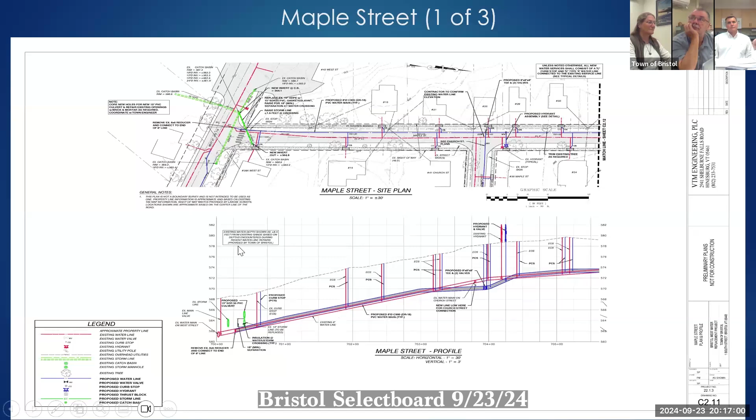Get a pretty good feel. We've got some sidewalk conflicts here - you can see the little boxes right there. That's what we're anticipating, we're gonna have conflicts. We've got to tie into those existing lines.

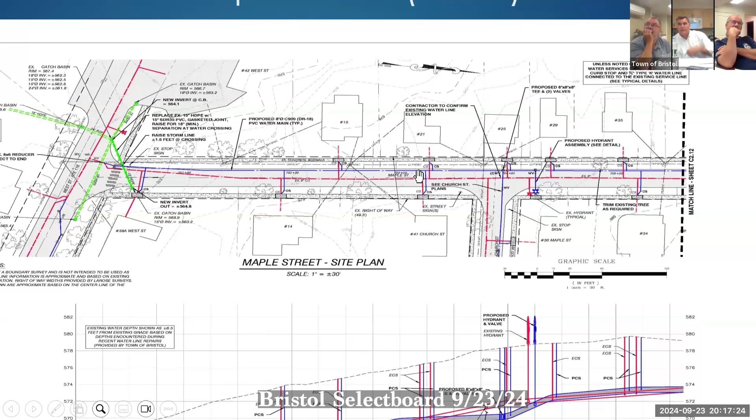New curb stops - obviously the curb stop's gonna be in the green belt, between the sidewalk and the edge of the road. Can you zoom in there please? You'll see, that's exactly what we're proposing - see where it says CS? And then tie in on the angle. CS means curb stop?

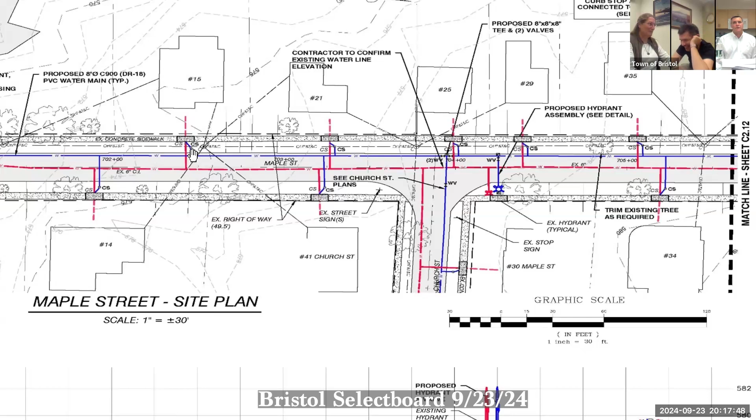Well, we didn't want to have a cross, right - we were trying to have T's rather than a cross. So that was our approach to that. We probably could have gone the other way just as easily, but you went that way.

There's a big tree on that corner, if I remember. Yeah, there's two big trees, one on each side of the road - you can see them, actually. It's kind of going...

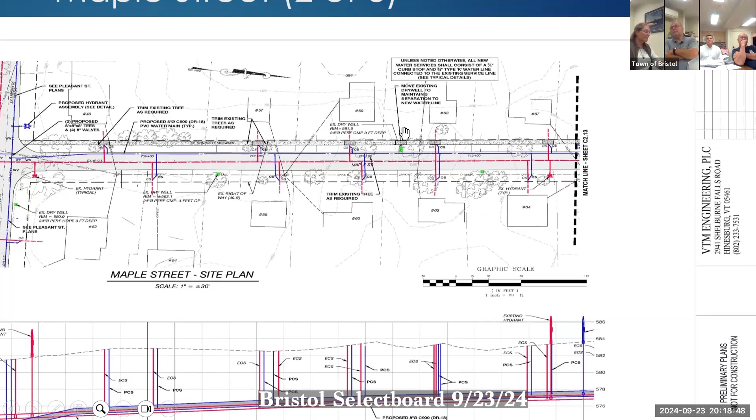What's this little green thing? That's a dry well. There is one there, there's a couple of them up and down that street. Literally, I think those were corrugated metal pipe with some stone around them. It was high tech. That works - still a dry well, it works.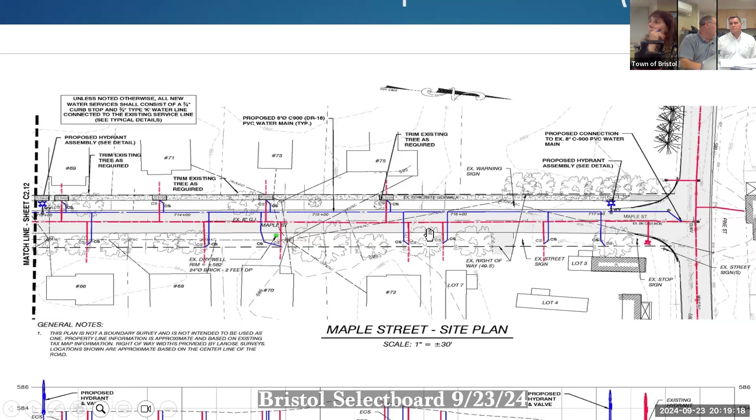We're tying into Pine Street right there, but staying on that side of the road. So, if we ever had to put some drainage from the intersection of Maple and Pleasant headed south in that lane, we could do it on the east side of Maple - could we go back one?

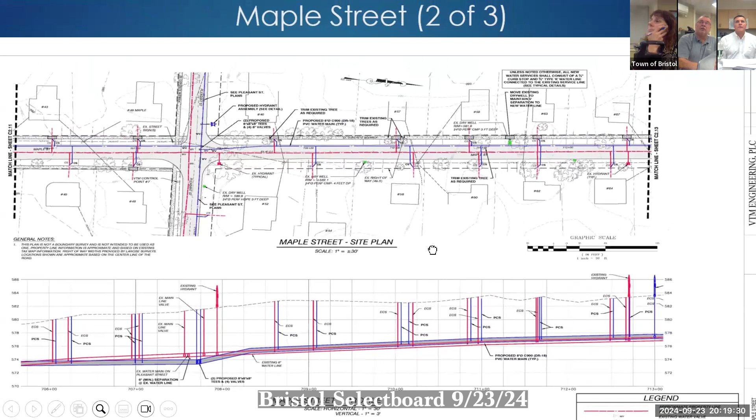Because there's nothing there. After Joel's trying to explain - there's no drainage, as you said, there's drainage that hooks onto West Street from the Maple Street intersection, the Maple Street West Pleasant intersection, then there's nothing north of Maple.

If we ever wanted to, years down the road, we'd have to do the same thing we did on 116. Are there drainage issues there today? No, there's not - not today, but you could put that in the northbound lane of Maple and not affect a lot of stuff.

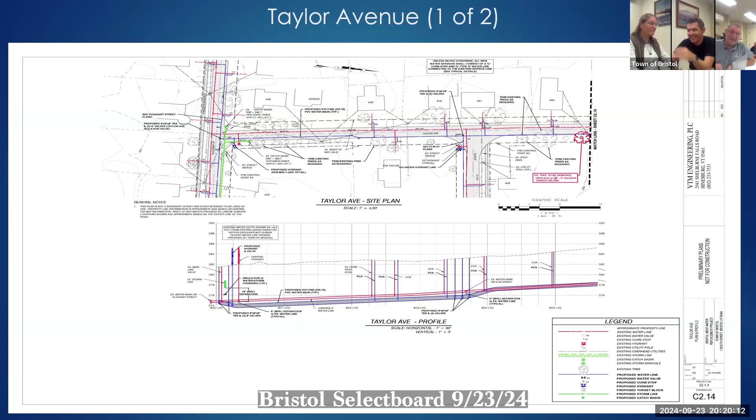I think we can zoom in on the end here. You've only been at it an hour, that's fine. I'll wait, I put you at 30 minutes. No, I bumped it to an hour. There's quite a bit. Mine says 30 here. No, this is the one above it - draft, helpful for me, next one down. One more, his is draft number three. Oh, we get about five of these before I know which one's the right one - the one that doesn't say draft. I didn't print that one off today, but there's probably one here somewhere. Sorry, getting punchy. One more please. You did, thank you, oh that's a good one.

So I think I've shown that to you before. That's one of the service lines. That was a small piece, a 12-inch piece that Joe and I cut off from Pine Street.

You couldn't see daylight through one end or the other. But that was still servicing a house - they were still getting water through it. How is anyone getting water through that? I don't understand that. That service line was, what - remember that thing, the pipe was made out of marbles, stones, sand? Oh, that's what that is. Ian, look at that pipe he's holding in his hand.

That was made out of, what was that Steve, galvanized? You see why we want to go copper to the houses, not PVC. Yeah, that particular homeowner told us they couldn't run more than one appliance at a time. If they did the wash you couldn't take a shower, couldn't shave if you flushed the toilet. Well, you could - you just couldn't draw any water.

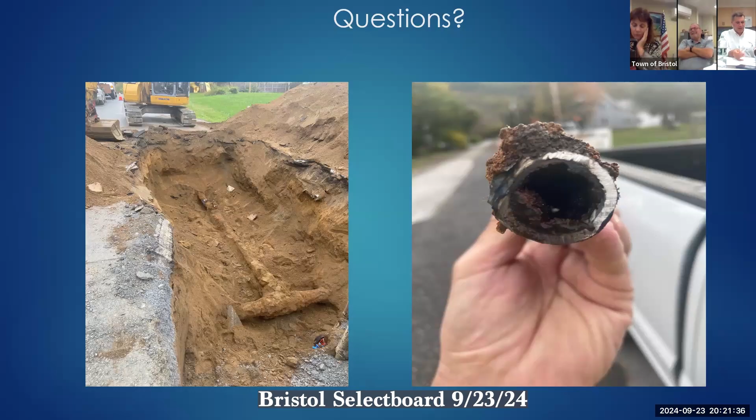Okay, great, that wraps up. Sorry to keep you so long. No, I've got some good comments for folks. Actually I have to go back because I have a comment on the next document and I saved it somewhere.

What do you need, Val? Do we need a motion to approve subject to the comments? Probably wouldn't hurt, would it? We'd have it in the record. Sure, what do you want - approval of what now, the 90% completion? Let me just, subject to the comment, hold on before we take comments, or before we take a motion.

Is there anything from the Zoom? Anybody - you watched an hour of presentation? No? Okay, all right, I'd entertain a motion to accept what we've been presented so far. So moved. Second. There's a motion and a second to accept our 90% design plans from Steve Palmer. Any questions for Steve on the last one? Hearing none, all those in favor please say aye. Aye. Opposed? Okay, abstain, okay. Super, thank you Steve, thank you Steve.

You're gonna stay for the next one, are you? For sure - Bristol West Water Line Replacement Project necessity resolution for the November 5th bond vote.

Valerie, you've got that language, right? Yeah, so hopefully folks had a chance to look at the draft. Can you put it up? Yeah, because I had a question and then I shut my computer down. Okay, so it's like - I published, I posted online the initial draft, and then we heard from our bond counsel.

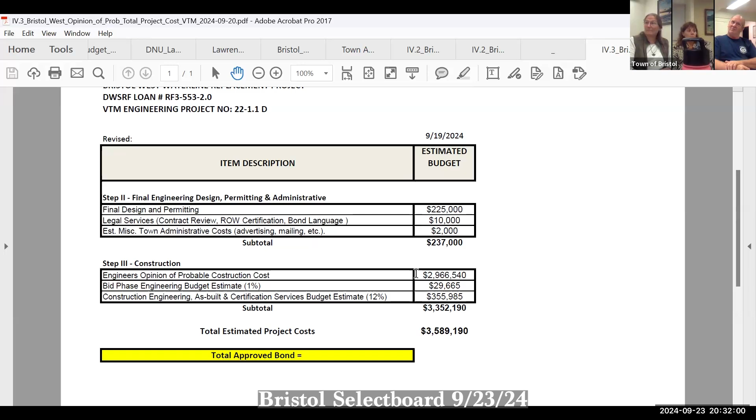So if 3.6 is what he's got, I think I would bump it to 3.75 and then we're covered. I was thinking even not to exceed 4. I want to get to 3.95, once you get under that 4, I don't want to say the word 4. I think the bigger the project, the foot cost might be a little different.

I don't think it's gonna be like Pine Street by any means, I agree with you, but it's more involved. You've got directional boring, you've got a lot more sidewalk work they could do, more traffic control. So, 3.9.

Trying to remember what we bonded for Pine Street, it was a lot higher. 940, that's what was in the old document. Right, of course, so I'm pretty quick sometimes when it comes to numbers, yeah, it's right there.

Okay, so 3.9, is that what we're agreeing on? 3.9999 — I wanted to go with 3.9.

Special, 950. So point of clarification for me, am I supposed to, were you folks asking me to include the drainage work for Munsell? And is that part of the bond?

No, so we're not gonna do that even as a contingency? No. It would be separate, piggybacked, because it can't be rolled into the cost. You'd have to keep track of it all separately.

No, but I thought we were going to — that's Eric's deal. That's correct, Eric's coming out of Capital Road, but I thought it was totally separate, just like Western.

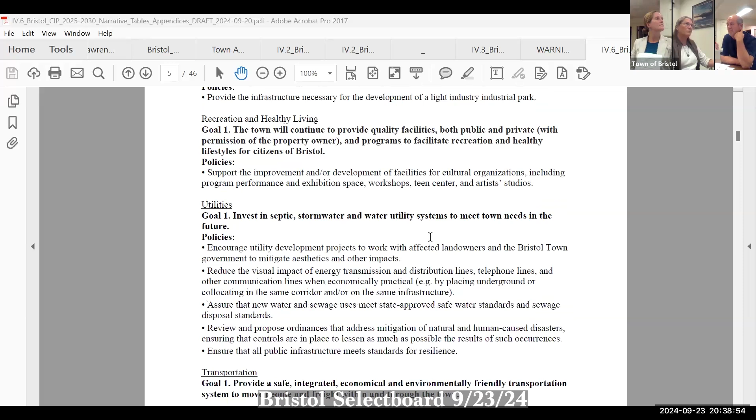So just to quickly summarize: the document relies heavily on existing information, so I took a lot from the town plan highlights and summarized a lot of that relates to capital priorities and needs. I tried to summarize them here, and they're also captured in one of the appendices in the back, highlighted specifically for capital improvements. That was really helpful for today's purposes in Montpelier to get the downtown renewal application reviewed, and of course it passed with flying colors.

Yeah, that was the last one we have to do. Huzzah, the very last one we have to do. Until they change the rules again.

That's true. But this document clearly shows the town's previous investments in infrastructure that supports the downtown, the economy, the public environment, public transportation, all those good things that support a vibrant downtown. It shows what we're currently doing, and it shows what we intend to do. So in that sense, it's been successful.

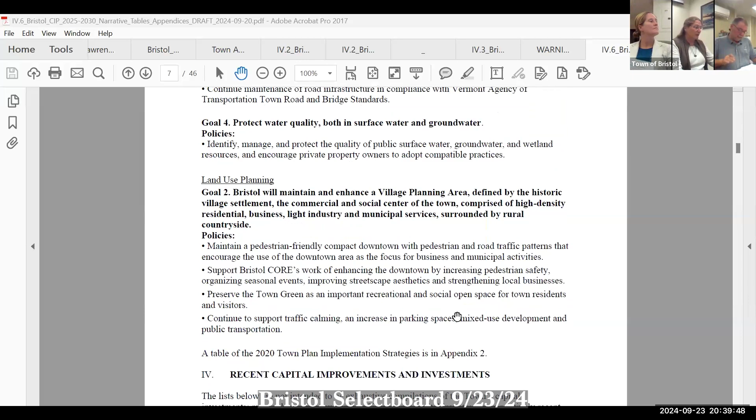So it goes through the town plan, summarizing recent things we've done in the last five or so years, just to remind us of all the amazing things that have happened. It's pretty remarkable, and it demonstrates to the downtown board and others, the community, the types of investment this community has made to really improve quality of life, infrastructure, public health and safety, all those good things. And then this section attempts to describe many of those projects and include recommendations about going forward.

So these recommendations are where folks can choose to weigh in at some point. Tonight, though, hopefully we're looking for some final action. So if you have anything in particular to clarify.

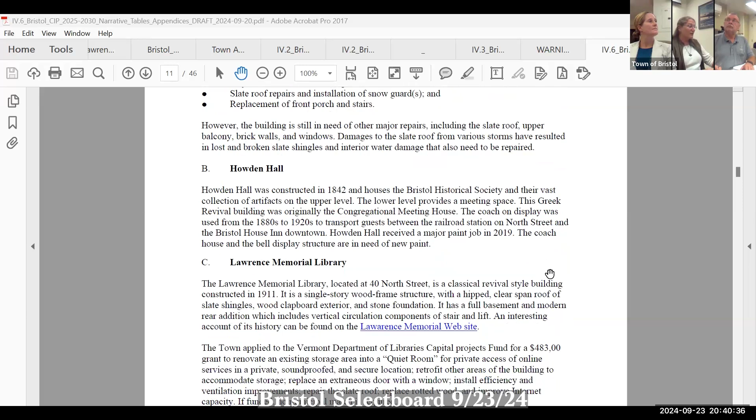One thing I learned since doing this draft, and I don't think I updated it, was about the fire station antenna, the communications tower. This draft focuses a lot on the prospect of a Firehouse Drive location, but there might be other locations that might also be worth looking at.

The state's currently working on an upgraded radio communications plan as well, so it might change. So we could choose to update this document to include other language, or just accept it for today's version and know that it will evolve. This, to me, is an ever-changing document. Whatever we do, it's gonna constantly be changing. And it acknowledges, it reflects what was known at that last time, not necessarily what was newly known last week.

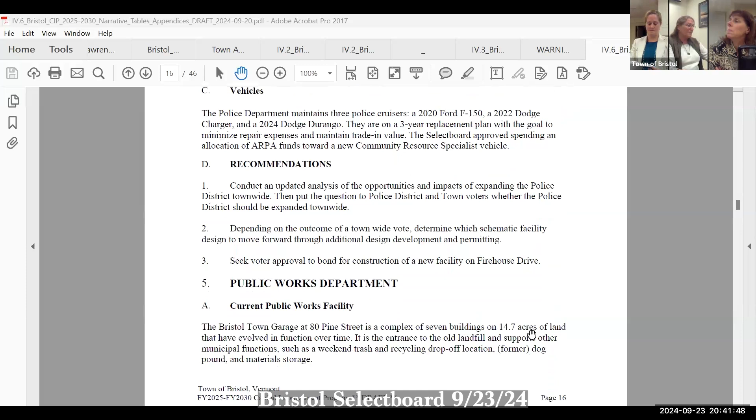So again, it reviews our existing buildings and some of the things going on there, some of the issues confronting some of our existing buildings. The police department, vehicles, talks about the public works facility, both the current one and some of its deficiencies, and the new one that we're looking forward to. Landfill, dog pound, gravel pit, roads and bridges. On the roads and bridges front, I just want to mention that...

We received word last week that our application to the Regional Planning Commission for the speed study and truck inventory requested by citizens on North Street did not get funded, because the regional planning folks felt they could do that work in-house. They didn't want to use that limited pot of money to pay somebody to do something they felt they could do in-house. Is that why the counter's on North Street?

Exactly. Yeah, they're doing a traffic count, which will measure the volume, the speed, the axles. It won't identify what types of trucks, where they're going or where they're coming from, but it'll give us a count and an inventory, more data than we currently have to work with. Another reason they didn't fund it was because they felt, okay, so you do this truck analysis, then what, what are your options? They didn't feel it would be cost effective to hire somebody to do all this analysis and then say there's really nothing you can do. So we're gonna get the data and go from there. Maybe once we have that data, we might become aware of additional steps we can make.

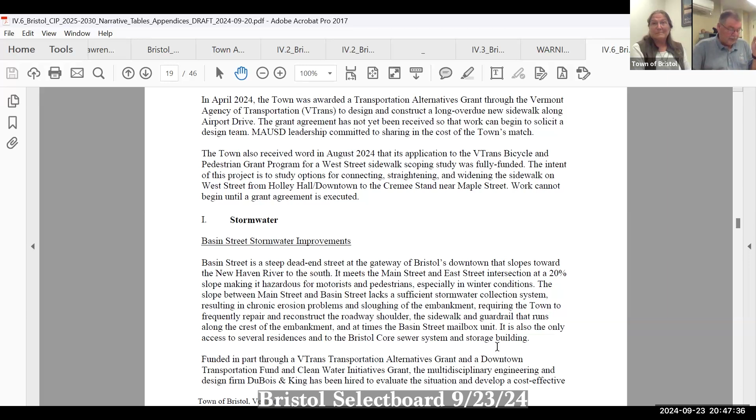Maybe so. Okay, alright, sorry to get off that, but now, after tonight, the capital improvement plan - the deadline was for today's downtown board meeting for the downtown renewal. That was the push, that was the priority.

It made a huge difference in our approval. The downtown board meeting was quite successful, and there was a lot of love for Bristol. The room was packed. By the way, I think Courtney is doing an awesome job, and her presentation was fantastic. It was all just so positive. It was really great.

I make a motion to accept the capital improvement plan as in its current form. Is there a second? Peter can second it. Any more questions on that?

I think the only thing I'd like to point out about these plans is they're a great planning tool, but we have to be careful that they don't become, because it says in the plan we're going to do X - we'll definitely want to revisit these things as they go. So there are certain things in here that I wonder if we need to do all of them at the same time. I know we've already said it's a planning tool, I just wanted to put that out there.

We'll just want to use it as a planning tool, and not because it's in here, we have to fund it, right? To me this is a work in progress. It's constantly changing, an evolving document. So it's not a guarantee.

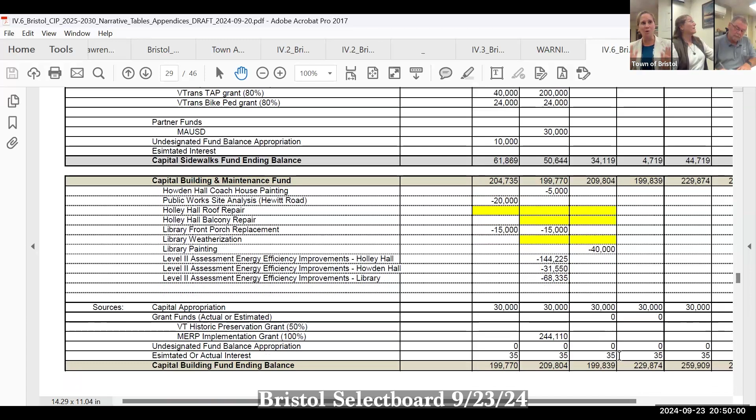And then the stuff that's in yellow, we haven't figured out yet - Holley Hall roof, we don't know. I think this is all really great, it's just that we might want to have conversations about what we fund or what we don't. In political science we call this agenda setting power - it's actually the biggest power you have to get things done is to set the agenda. So that's all I want to do is just put the word out there that just because it's written in here doesn't mean we have to do it exactly in this order or all of these projects.

But I do appreciate the planning, without being able to step back and see the big picture of what we're dealing with. That was my original goal 5 years ago when I started doing this, was what's the big picture of all this stuff? I didn't see it, I needed to see it. I'm a visual person, I need to see it this way. And then what I think is really nifty - I skipped a page there, blank page.

But where I'm going with this is, so this is the really nice thing about being able to look at the big picture - with what we've said we're gonna do in terms of contributing to the capital funds every year, we lay that out, then we do it. Sometimes we add more, I don't think we've ever done less, maybe. And then the debt, what we know of is debt. But you look at the bottom lines and it shows that from a planning perspective, we're achieving stability - there's no big spikes on the horizon based upon this plan.

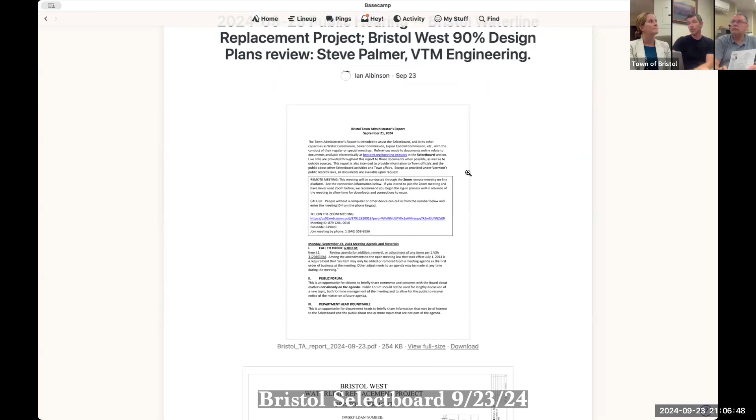I've already started to put this - I created a message about this particular item this evening. And within the message you can just attach PDFs, so all the details are there. So instead of having to go to the website and find documents for our particular meeting, this would be its own message entry.

And you can jump back at any time to different sections within, and these are all customizable. If we never use chat, we can take that off and it doesn't have to appear in any project. Check-ins can be automatic - one of the nice things is that you can schedule things. So if it's a personnel item for the Public Works Department, we could schedule the check-in a year from now or 6 months, when it's someone's time, if they've completed certain stipulations of their contract or hiring.

A check-in could be a good thing, instead of us saying, what did so-and-so have to complete before he got bumped up a pay scale? That could be in the personnel section of that area. This is really good for turnover too, to keep everything in one place, because everything is within one area.

So I'll keep working on this, and you might see communication from me to test it out in different areas to see what people think. Okay, and that's all I have.

Okay, Michelle? I don't have much. I do want to thank Bruce and his officers - I know the parking up on Briggs, the beginning of Briggs Hill, was a real problem this past weekend. Crazy, I was like, people are lazy because there's a parking lot right across the road and they choose to park right in the road. But yeah, I see they put up signs, so I appreciate that.